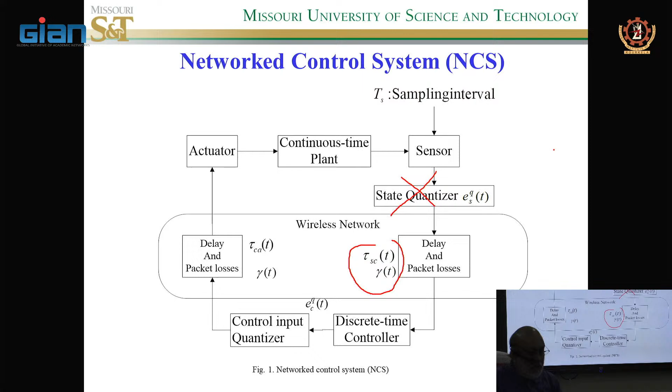Okay, so then you could actually use the output and construct an augmented vector. If you're using the output, it's called an input-output system. You see that? But it has its own nonlinearity, F and G. If you're using the state, you also have another H and M nonlinearity. So they're all the same, only a small difference, okay? So then this part is standard.

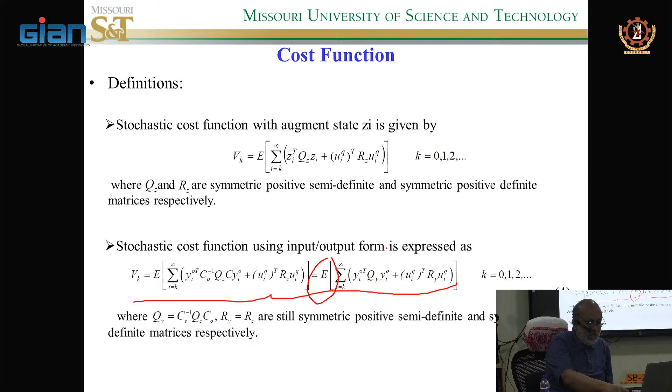We define the value function. We use the Bellman equation here. You see that? This equation is the Bellman equation, a recursive equation. But since we have the packet losses and delays, we are using the stochastic domain, expected value. And then basically you do the dynamic programming, right? So last time we went through this part with an identifier. All this we have covered, okay?

And then SAR actually gave you some papers. Remember that? The papers essentially give you maybe a little more details in there, okay? So I would encourage you. I normally don't want to put the papers because sometimes it could be more compact, but it looks like there may be more information in the papers than in the slides. I just made it so that you can finish it off within the 2-hour lectures. Okay? And I also want you to focus on this.

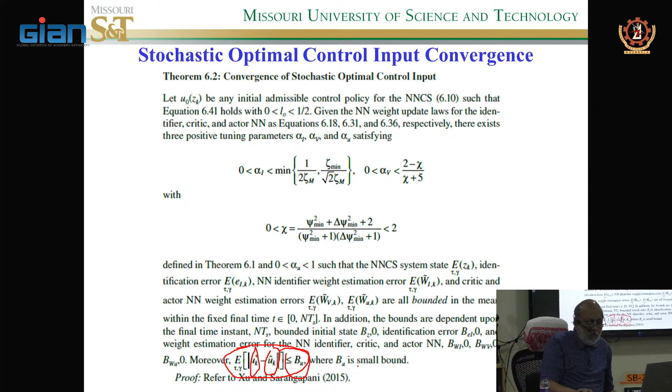You look at that in the proof. Not only are you showing boundedness, you see this hat here, essentially showing that here is my optimal control value, here is my actual control value. I'm showing that the expected value over time of the difference is going to be bounded by a bound Bu, and Bu is small. So this is a finite horizon. What we are trying to prove is the error between the actual control input and the optimal control input is very close.

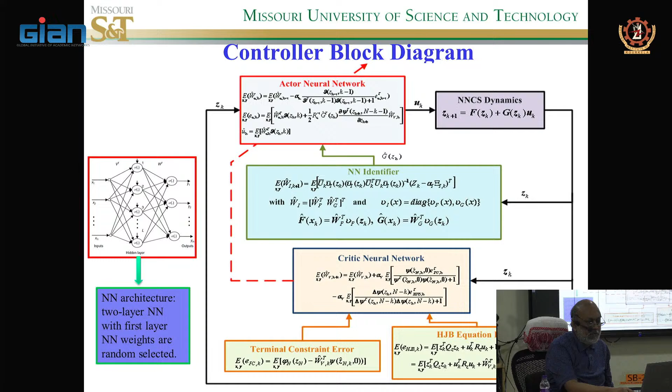Now why is it not exact? Why is it not converging to that U star in this case? Why? And don't feel bad, don't feel shy. You can guess. Why are we only showing bounded? See here also, we're showing it's bounded in the mean, but we are not showing asymptotically stable, we're not showing that UK hat converges to UK star. Why? So what is causing that bounded result, not asymptotic here?

In this equation, for example, look at this equation. What is causing that not asymptotic?

You need to talk louder. There's fans running here.

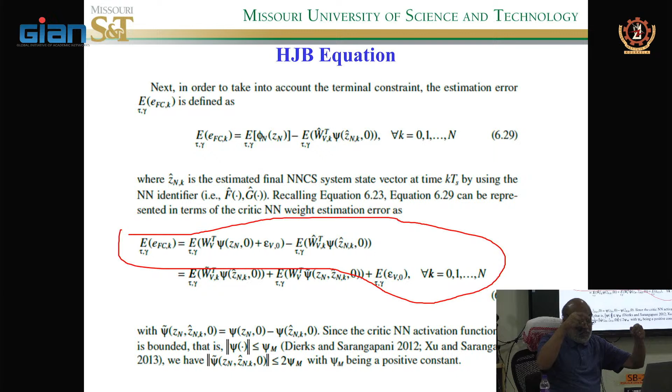So what is that? You will never be able to show asymptotically stable unless this particular term becomes 0. This is a nonlinear update law, but that has nothing to do with the update law, nonlinear or linear. But there is a nonlinear term rather than converging asymptotically to 0. If it converges to 0, that means UK hat goes to UK star, right? The optimum. But here it's reaching close, therefore we are claiming it's bounded in the mean.

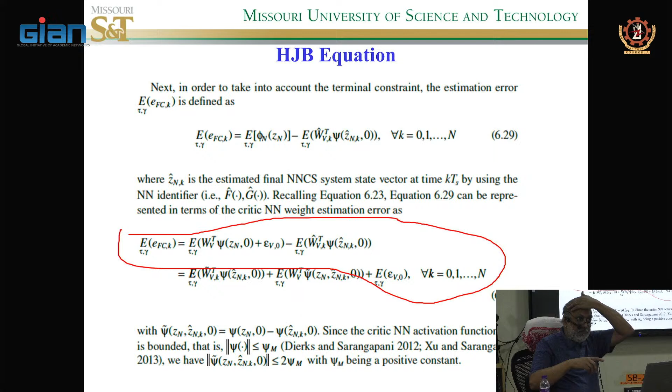So what is it in this equation that's causing it, or if you go to the next equation, let's say, in this equation, for example. So what is that term that is making it non-zero?

Taking expected value. It's an expected value, but that won't be, but there is some other thing. So in this equation, what is the term that is non-zero? So the first term is what? The first term is basically approximating the bulk of the value function, right? So this is a neural network, output WV weights multiplied by the basis function, right? And what is this term? What is that? So what is that term?

So those who know, how many of you know neural networks? A little bit. You know neural network, right? So what is that term? Right, why? That's my question. You will be able to, but what is that term? Usually pops up in neural networks. So the target is there and this is actual. This is a target value, right? W. That W is the target weights. You see? So what is this term called?

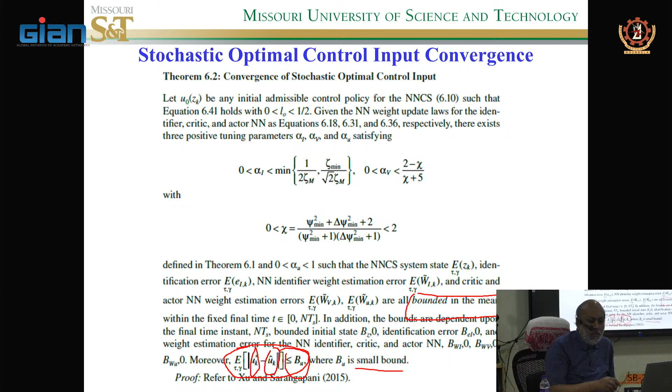Okay? Any other questions? So this is what we did last class. Flowchart, we went through this example. Okay, I want you to go through this example. And then let's do the nonlinear stuff.

Okay, so we talked about the heuristic dynamic programming. This is a method which uses the policy and value iteration. So it's called HDP. And I'm going to look for a paper. I have no access to Google, so I'm asking one of my students to send me one of the papers so I can pass it to you. So this approach called heuristic dynamic programming uses a value iteration, a different approach to solve the same thing.

And there are some problems like I mentioned in this approach, but we're going to use this to compare our approach. This is more like an offline approach. This has got an iteration-based approach. Okay, so we're going to compare ours.

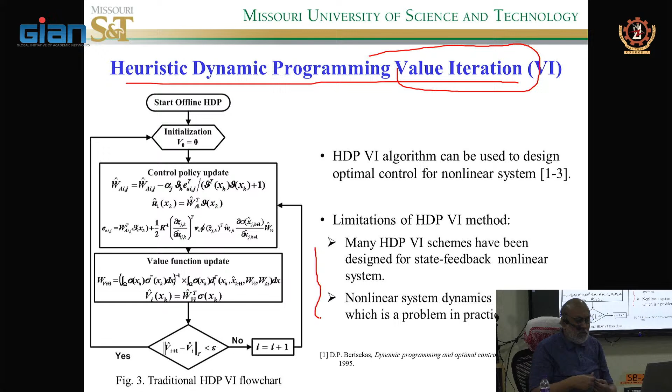So now we would use a different system in terms of the output. So what I'm trying to do is, this is for infinite horizon. So you see that the cost going up to infinity. The other one we did with N minus k. Okay, so that's a finite time.

So since we don't know f and g, first step is to use an identifier, right? We talked about it. So we are using an identifier, and you remember that we have a big neural network. So we have one neural network to identify both f and g, and then we define an identification error in terms of the output. This is the estimated value of the output. This is the actual value, your measured value. You are taking the difference, and then you are coming up with an update. And we talked about this.

It's very similar to what I presented, and you need the inverse of this matrix. So in order to have the inverse of this matrix, remember we take the history here. And why do you need the history? History, but what condition it has to satisfy? PE condition, don't forget that. What does PE stand for? Persistency of excitation, don't forget that. Persistency of excitation.

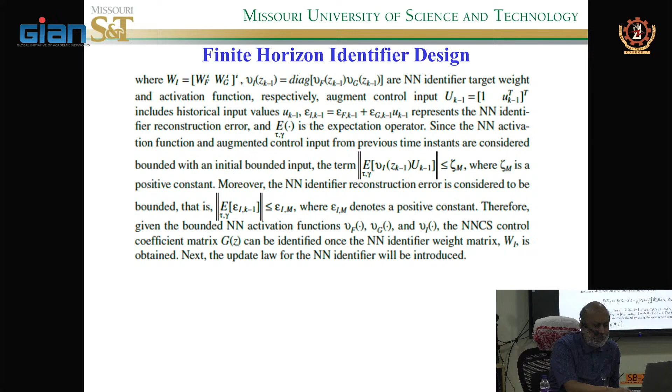So one thing, F and G both are linear and non-linear. That is correct. Okay. Let me go back to that slide. Yeah, it's non-linear. Go ahead. Sir, I am just surprised that any properties of that F and G, even though you are not knowing it perfectly, any properties of F and G are not required; that is not coming. Other than this, you are assuming some error. Right. I think there are properties that are required, and what is not required I don't know whether you can find. But I can tell you what is required.

One is both this F and G. You see that F and capital G, right? And that's a function of the output, because that's how I'm modeling it in terms of the output. Just to show you, the first half I did the finite horizon, it has a state. The second half, which I'm doing the infinite horizon, I'm doing with respect to output. You asked this question earlier, we could model it. But once you incorporate the delays and packet losses, that's equation number 3. Right? So even though you incorporate it in the stochastic domain, it still has to satisfy the Lipschitz continuous property.

You have a capital F and G. That is correct. Because in that transformation only, you are designing the control input. And it has to be controllable and observable. Now remember, we have shown in chapter 1 that if the original system is controllable and observable. No, that is okay, but if it is Lipschitz continuous, then there should be some kind of K which should appear. That's right. That K comes in the bound. As a bound. That is correct.

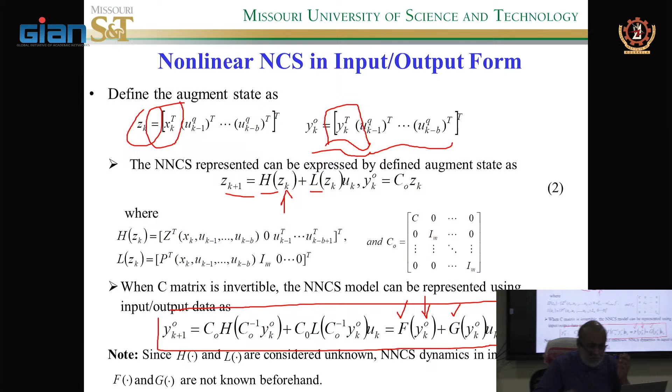Okay. So basically that's what we're claiming. Since this is unknown, these dynamics are unknown, and therefore we are using the neural network because we don't have precisely the dynamics, mainly because of packet losses and delays coming from the network. Okay, so let's go back. If no other questions, at least I'm happy we covered the approximation stuff here.

Okay, so from here onwards, we are using reinforcement learning. If you remember, we are writing this error, the residual error or Bellman error. We are taking the V and moving it to the right hand side. This is the temporal difference: V of y of k plus 1 minus V of y of k. We are equating this equation to an error since we are using a neural network. So this is k to k plus 1 and this is k plus 1 to infinity. So this is a recursive equation.

You always see that. Okay? And so this error is the Bellman error, or Hamiltonian. Ideally this error should be 0 when it becomes optimal. Got it? It has to be 0 when it becomes optimal. Now, remember that concept from high school math when you are trying to find minima and maxima: you take the derivative equal to 0, right? Remember that? The same thing.

So now we are writing this term here, V and all that, in terms of the actual weights. So this term V minus this will be W hat Vk times the difference between the bases at this time and that time, given by this delta. The delta gives you the difference. So this is the cost to go from k to k plus 1, and this term gives you, in terms of the weights, from k plus 1 to infinity.

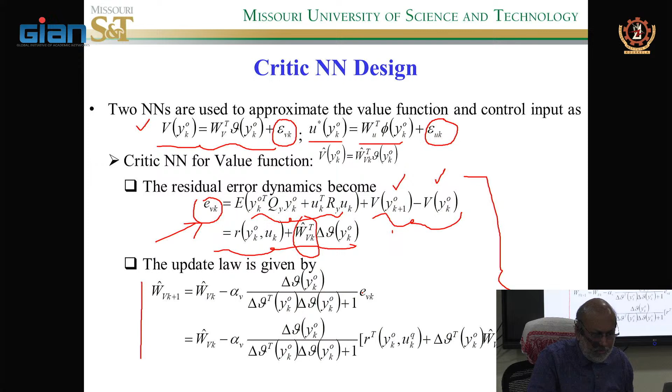Okay? Now we need to come up with a weight update law for the critic. So we use the same type of weight update law, gradient descent. So here W hat of k minus alpha V times this. Now remember I told you this value is always going to be less than 1. Remember A over A square plus 1. There's a reason we did that: in nonlinear control there was a proof that shows that if you are using this, called the normalized update law, it ensures convergence and stability, okay?

But the disadvantage of that update law is that it makes the convergence a little bit slow. So in nonlinear control, people don't like that. So keep this in mind. There are other ways to do it, but proofs are very difficult. That's why we have to do that. Now look at that. This update law is driven by the Bellman error. And this EVK, you put that expression in and you get equation number 10. We know these quantities, and you are constantly tuning the weights of that critic network. Any questions?

Any questions? So, tell about the gradient descent. Okay, so gradient descent is like a hill, right? So you have a hill, and you really want to come to the bottom of the hill. That's where you want to converge. And you are somewhere here. Normally we teach this in neural networks and other stuff. So you start here.

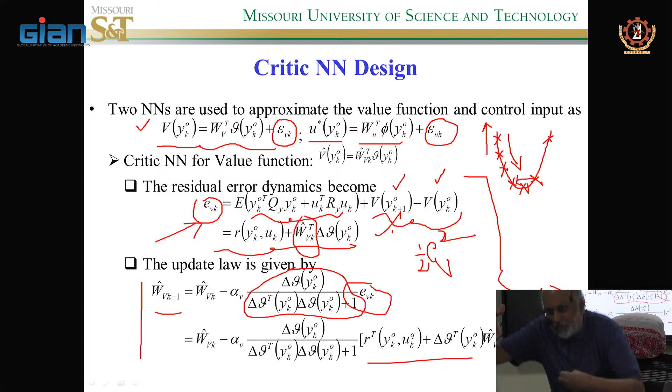So what you do is you take half. This is Bellman square and then half of that. Then you take the gradient of it, because you want to minimize that Bellman error to 0. Fair enough? So it has meaning behind it. I'm skipping it because I don't know whether we'll have time. So any questions? I think that was a very good question.

I didn't cover this because some of you don't have the background, and it takes a long time, but this is a very simple explanation. The more details are in the paper that Prasad has sent you. Look at that paper. But as I said, you've got to have a neural network class to understand optimization. This is all typically covered.

Like what is a gradient descent. And you always take a quadratic function. You take the derivative with respect to the weights. That's why you're getting that equation there. And the goal is that you want to minimize it and you reach the bottom of that hill. Okay? Any other questions?

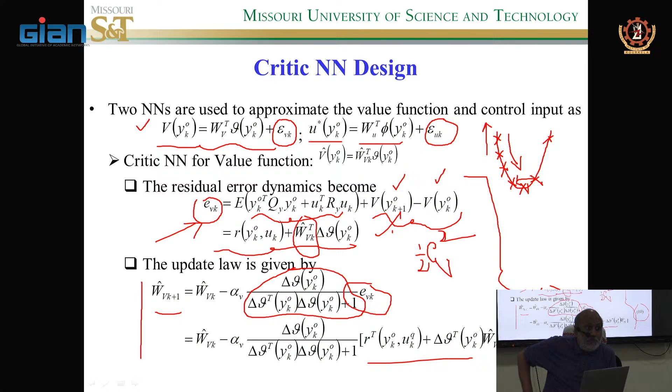Okay. So remember I said there are so many courses included here, and it's not possible to cover all of them in that short 2 weeks. We were thinking maybe we should do it in 1 week, but 1 week would have been even worse. So maybe 2 weeks is kind of an idea. I know many of you came leaving the classes, right? So 2 weeks is a long time if you are missing classes. Okay? All right. Any other questions before I go to the next slide? No. All right.

So the same thing we do for actor design. The actor design, that's the next thing. We did the critic. So the actor design is basically approximating it by one single neural network, and that's because you need the G. You need the capital G in this case, and since we don't know it, we are approximating it, and we need to find a way to tune these weights of the actor.

And so you see that since we don't have the G, we are replacing that G by the G hat from the identifier. So we are computing the optimal control input in 2 different ways, and we are subtracting them because they are both supposed to be equal. And since we don't have any measured quantity, this is the best way to show. So this is the output minus this, that would give you the plus here, and that is basically what we call control input error. So this term is called control input error.

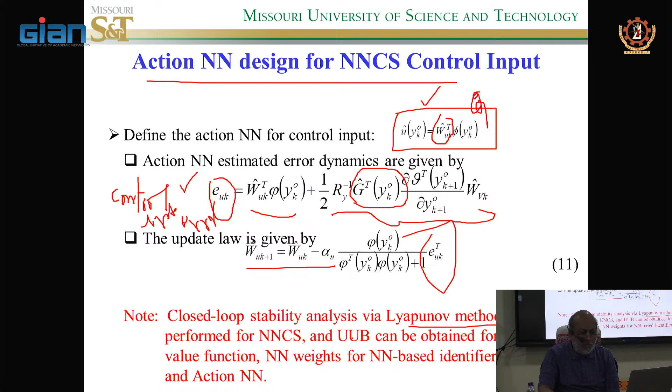Okay, control input error. So this is the measured quantity. So we use this quantity to tune the weights of the actor, and we use the same gradient descent. Okay, so now with this we can show the proof. The proof is in the paper, and via the Lyapunov method we show UUB. Remember I said UUB can be obtained for the identifier, everything. And in the proof, I want to show you a little bit.

Since we have not covered it, I have this slide, and you see that you need to first select the initial controller to be admissible. You can pick a stabilizing control policy here, which would basically make it admissible. So this should be an admissible control policy. You use these weight update laws, and these are the constants. And you claim that the identification error, output error, and weight estimation errors of the critic, actor, everything is UUB.

And look at the Lyapunov function. The Lyapunov function is quadratic in the output and identification error. So there is an identification error, the value function weight estimation error, Bellman error. Then you have the critic error, and this is the identification. So everything is included. And then what do you do? You take the first difference. In continuous time, we take the derivative of the Lyapunov function. In discrete time, you take the first difference. Then you manipulate everything and you show that delta V is less than.

Okay, you see that you have some positive constant times k square. Sir, you see this k? Yeah. You can miss it. You can miss it.

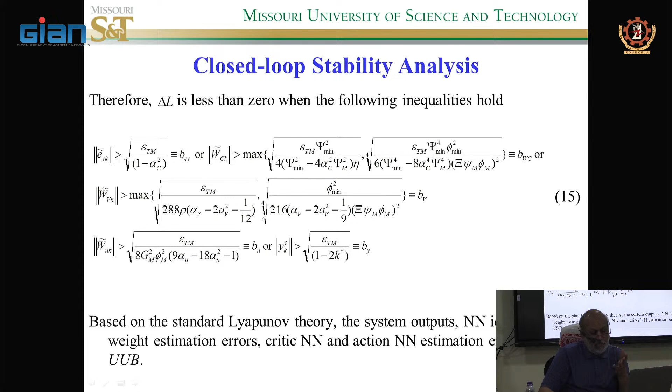Okay, so let's see if this makes sense. So here are the bounds. I was showing that the error in the output is bounded, the identifier weights are bounded, the value function weights are bounded, the control input neural network weights are bounded, and the output is bounded. So we show that it's bounded in the mean, so basically everything is bounded.

And then that loop goes back here. Okay? So k is the time, i is the iteration. So remember I told you, you hold the time in a sampling interval, you iterate it till it converges. Then once it converges, then you increment the time, k equal to k plus 1. And then again you go back and do the iterations.

Within the sampling instant. That's right, that's what I showed you. That's the drawback. Remember I showed you what happens when you do that, because nobody can tell you how many iterations you need within a sampling interval. And that depends on the nonlinear system. There are so many different factors. No, same. Yeah. Same.

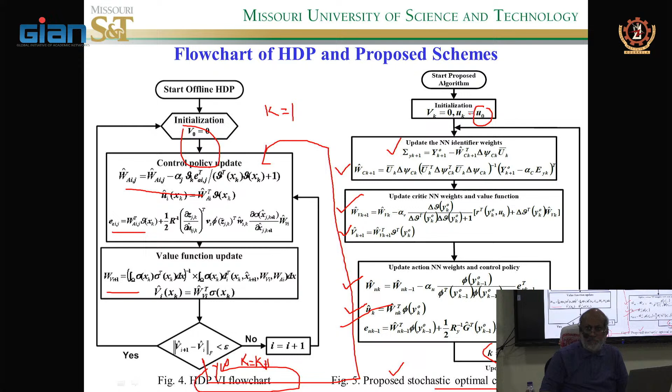And then the control input error to tune the weights, and then here there's no iteration, so k becomes k plus 1 and you keep going back. You see? Any other questions here? Any other questions?

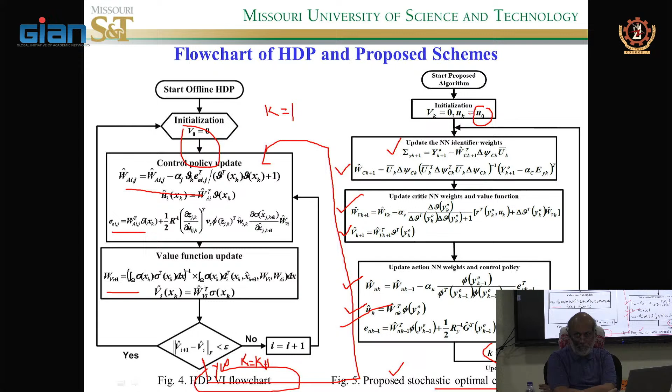And here is the history. So sampling interval is ts equal to 0.1 second. The delay bound is chosen as random delay. E of tau is this. Bernoulli distribution with p equal to 0.1. Here identifier, critic and action are updated at each sampling interval, like I said. So now we started with HDP, the heuristic dynamic programming value iteration. Now look at that. If I'm using 100 iterations per sampling instant, nicely stuff converges.

Okay? Now what happens when I'm using 10? What happens here? It blows up. Okay? And it blows up because in the numerical iterations, it's not converged. So if you stop the numerical iterations halfway through, it won't converge. Instead of converging, it blows up. It's not even bounded.

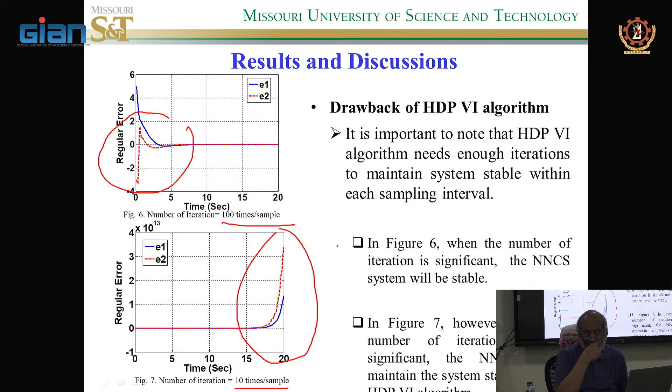So what does it tell us? It tells us that delays and packet losses can cause instability, even though that particular controller is able to stabilize the nonlinear system without delays and packet losses. You understand the difference now? So we are taking one at a time, and we are trying to show that.

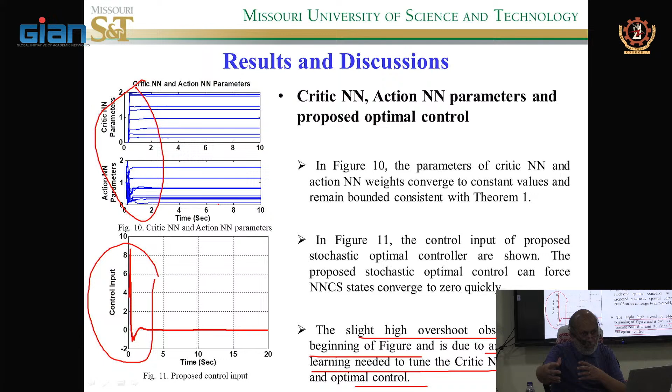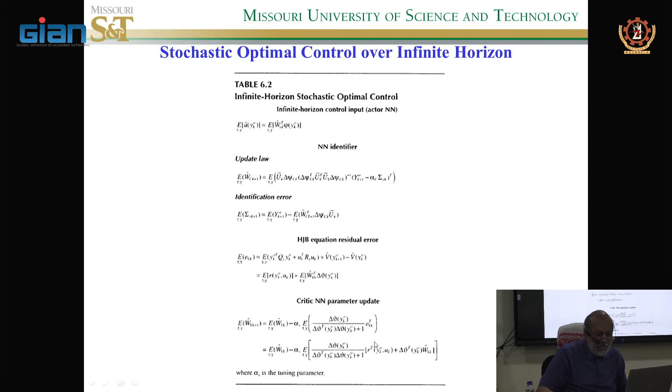Here is the flowchart. The same thing we did: control input, update law for the identifier, the Bellman error, residual error, critic update law, and then it goes back. Okay? Another example. This is a different example.

Here, look at that C matrix. The C matrix is different, right? You saw that? And this is invertible. C is not invertible? Yeah, it is invertible, right? So C is invertible. This is a different system, and here the Ts sampling time is 100 milliseconds. Delay bound is set as 2, D bar is 2.

Mean random delay values are 80 milliseconds. E tau is 150 milliseconds. This is sensor to controller. This is controller to the actuator. And packet losses follow a Bernoulli distribution, P equal to 0.3. And to capture the ergodic behavior, always we are doing Monte Carlo, 1000 iterations. Don't forget that. We do the Monte Carlo and we average them out. Goes without saying, because all this is stochastic. Okay?

So, the augmented state vector, remember we talked about it, since output alone is measured, yk, see that? So here is yk, and then in the augmented state we are taking uk minus 1, uk minus 2. So the dimension of this vector is 3 by 1. And we are using tangent hyperbolic and a polynomial activation function. Okay, and here the critic uses a 6th order polynomial. And it was generated using the gradient of the critic. And here is the alpha C, alpha V, alpha U.

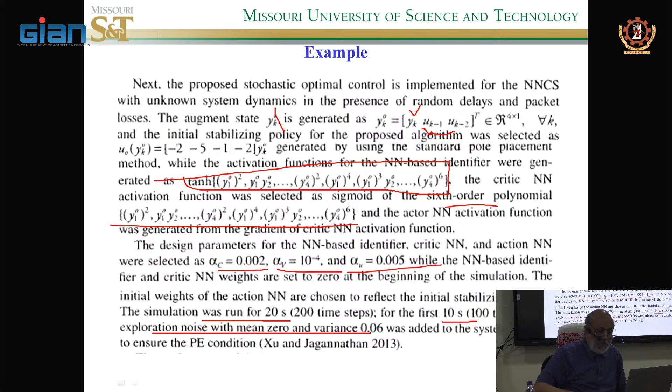Any questions? Sir, if the C is not invertible? Huh? If the C is not invertible. Then you can use it. You have to take the pseudo inverse. You could use the pseudo inverse, but I'm just saying that you have to have the C that is invertible. Well, you cannot, because it's not observable. You cannot use it. So you have to meet the observability criteria to use that. That's where that C is going to play a role, right? Remember I said if it's not observable, you can actually modify the sensor location so you get a C matrix. Yeah. That's right.

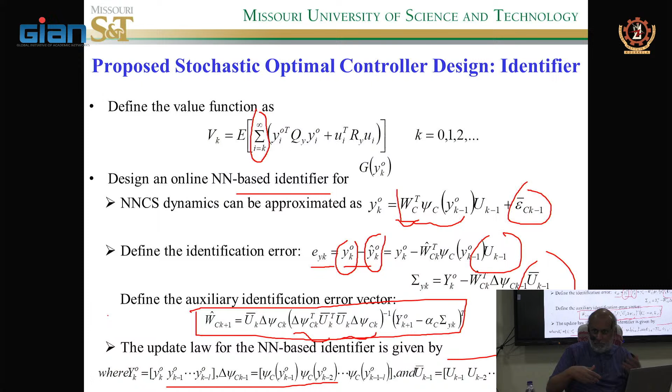All right, I think we may stop for tea, and that would give you what I thought. I don't know whether you were here. I brought my laptop, so I wanted to show you. We will not record this because I'm going ahead by one lecture. I thought today there would be more students, but it looks like there are fewer. We will do the same thing maybe at the end, if at all. So I'll play some videos, I don't know whether I have all of them, but I'll try. I'll show you the autonomy part, and if it's not there, maybe on a different day we can bring that, okay? Yeah, we'll stop it. We don't need recording anymore. Thank you.